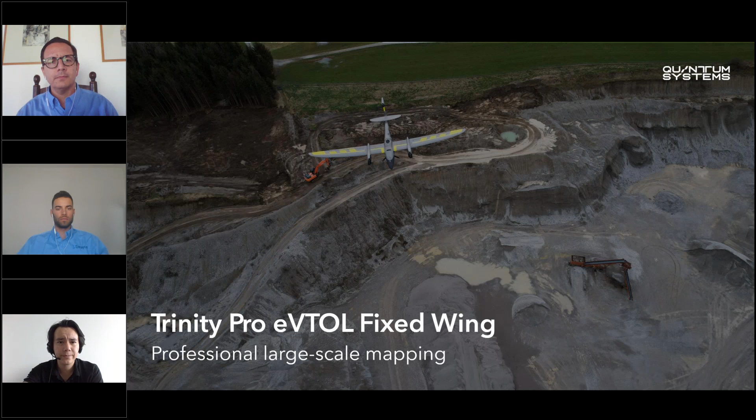Lastly, on the Trinity Pro, I want to mention the wide array of different sensors we have available, many of which are extremely useful in the mining environment. We have photogrammetry cameras, which are pretty well understood within the mining industry—the Sony RX1 and the Sony UMC. Both have different applications. We see a lot of guys using the Sony RX1 for its extremely high resolution and high quality outputs, and people using the Sony UMC when they're trying to stretch coverage and use a lightweight payload for rapid mapping.

Additionally, we've added to our portfolio with the Oblique D2M camera, which is really interesting as it enables us, within the mining context, to get extremely high quality data on pit walls and faces and any kind of vertical structure where you might normally struggle with traditional photogrammetry. We also have multispectral cameras, which a couple of mining companies are starting to use as they monitor the environment for different environmental projects. But typically, most of our mining customers stick with photogrammetry cameras.

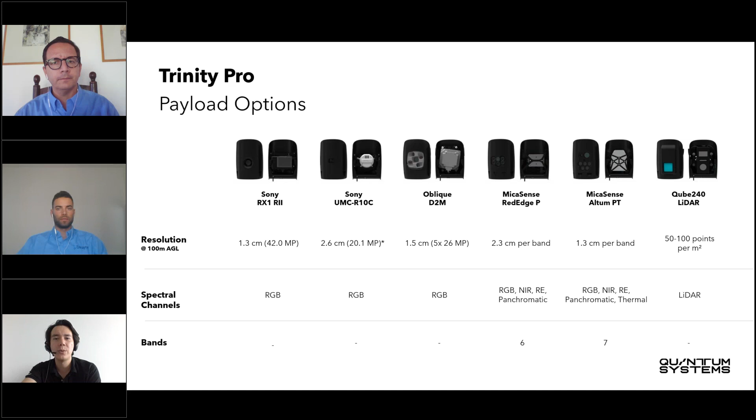And lastly, very excitingly, we also have a survey-grade LiDAR solution, the Qube240—the best-in-class survey-grade LiDAR on a fixed-wing platform, and it's truly exceptional what sort of data you're able to get out of it. We've had excited customers operating within a mining context who are now able to penetrate trees and canopies and capture the data they really need, irrespective of the different types of data they're looking for. So we have a huge array of different payloads, trying to make sure we cover every single possible application, and certainly within the mining industry, we have a lot of different solutions available.

As a result of that, over the last couple of years, we've been quite successful in the mining industry. I think mining is really one of those industries where people understand the benefits of drone technology and what they can do with it. We've got customers operating these drones in dozens of countries on every continent around the world, and that's given us a lot of experience. We've learned a lot from our customers as they push these systems to the limits, and we've learned how to build a system that's able to handle those limits and excel in the tough environments mining customers are used to.

It's being used by a lot of different companies. I'm not going to name drop any of them here, but some of the largest mining companies around the world have been using our platform very successfully, and they're expanding their utilization of them as well.

We've seen a variety of different applications. There's lots of different data sets you need to find around your mine site for various things, and as drones continue to be adopted more and more, we're seeing them utilized more and more in capturing that sort of data. That's really pushed the growth on our side—we've seen fleets expanding, applications growing, and generally the adoption of the market increasing significantly. It's been a really interesting couple of years, and we can see that the mining industry is really leading the pack in terms of drone adoption as they push the boundaries on data acquisition and what can be done with aerial data.

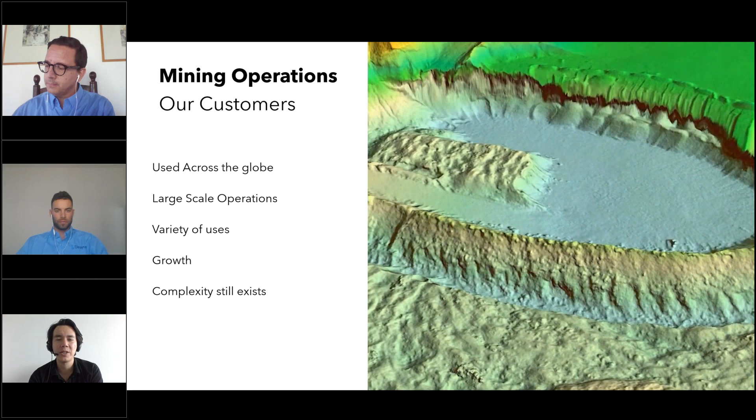That all being said, even though there are all these different users, there's still a lot of complexity with the workflows. I can remember going back to the beginning of the commercial drone industry and how difficult and complicated it would be, how all of the different software solutions that you had to jump through in order to actually use that aerial data that you've just captured. It's improved slowly but surely, but this is really where it comes down to today and why we're so excited about our partnership with Strayos, because Strayos have got a really wide array of different software solutions that will really change the game and change the way people are interacting with aerial data. They're looking to remove a lot of that complexity in the workflow and give our mining customers a really simple solution that enables them to be quick and efficient, and they don't have to be the absolute experts in drone operations that we've had to rely on over the last decade or so.

So with that, I'm really happy to hand over to Strayos, who are going to explain a little bit more about their software packages and how they're using AI to really push the boundaries of data.

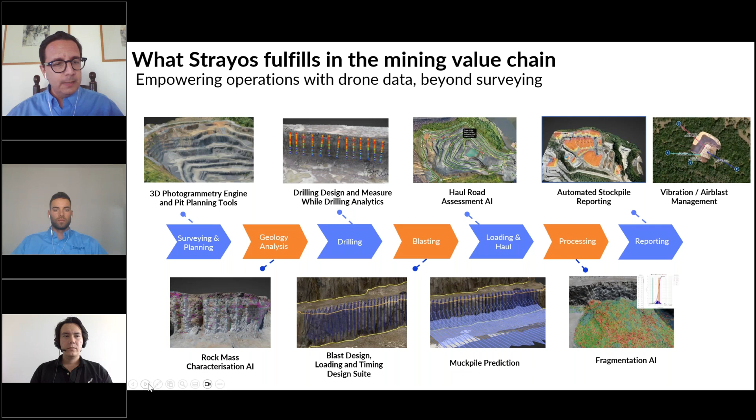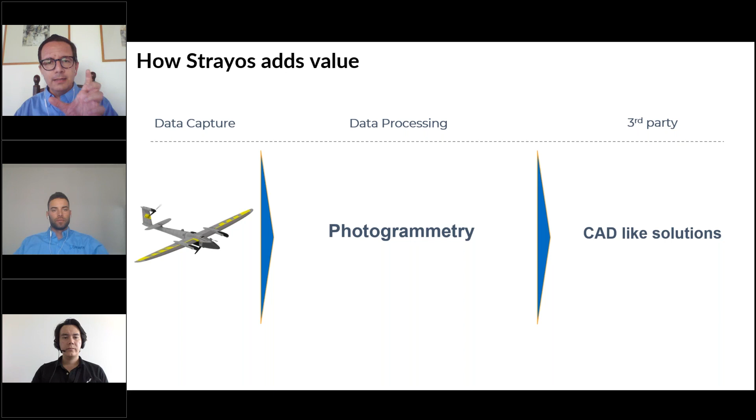We found, from a product perspective, that there was a gap we could fulfill on the data processing part. So there is data capture, data processing, and third party - this is an established workflow. But we said, okay, we can tie AI into it and mix it with photogrammetry to really extract more value from the data that mining companies are actually collecting every day.

So what was the thought around it? We said, okay, users don't like to change the workflow. They don't like to change standard operating procedures. But what about if we do all the heavy lifting and extract more data from the same data that is collected every day? And that's what we built.

So basically, the user goes out, flies a Trinity Pro, and then with the same exact workflow, collects data. The only thing that changes with Strayos is eventually a user interface, then uploads the data to the cloud. Then as a technology software company, we do all the heavy lifting, which also means we apply AI to extract more value from the same data. So from a user perspective, the same workflow, but there is way more value and way more use cases fulfilled, which also means once you bring it into a third party...

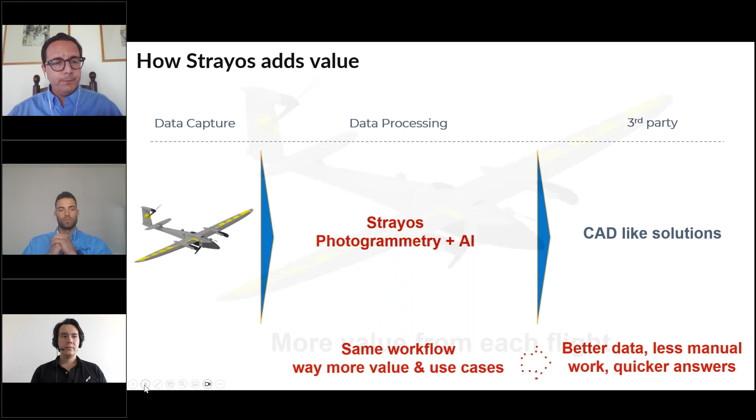These exist and have been existing on the mines for many years, so that's not where we focus. We really focus on that middle step. What is really happening is that we are able to bring better data, which also means less manual work, which also means we provide quicker answers. So essentially, we provide more value from each flight.

And this honestly has been a dream of mine for the last probably 10 years. I've seen a lot of data that is captured, and I always thought there must be something more that can be done with that data. And I think now we're really in a next gen phase in the industry where by keeping the same workflow, we can really extract more value. Without further ado, I'll pass it on to Eli, who's going to take us through some of the concrete use cases. I hope you'll enjoy the rest of the presentation.

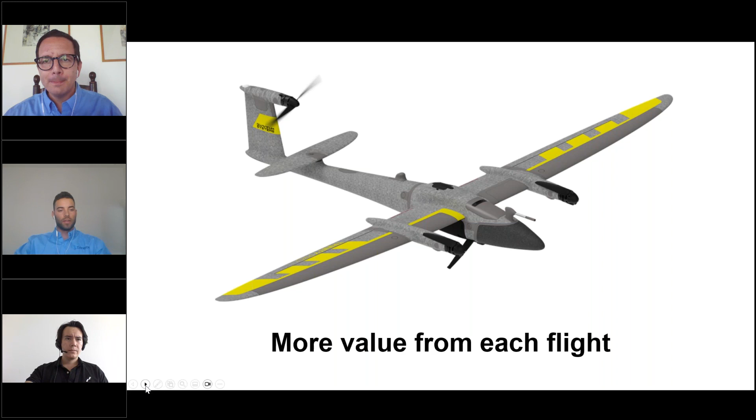Thank you, Matteo. Pleasure to be here and speak on behalf of Strayos and share some of the use cases here. Carrying on from what Rob and Matteo shared, what we're doing is bringing more value to these drone flights. What I'll share today are some specialty use cases and some vertical solutions to how we can apply AI to the mining workflow.

But by no means are these all the tools and modules in Strayos that can help on many different levels. I think these will speak well to the mining industry here on how we can improve on the current workflows. So we'll start things off with inventory management, carrying through to our haul road assessment, pit progress design, talk about high walls, and then end with our drill and blast progress.

So to begin, Strayos, similar to other photogrammetry softwares, can analyze and provide volumetric information regarding stockpiles and inventory management. What's different about Strayos here is where we apply the AI is the auto detection of these stockpiles. So versus an older workflow where you might have to manually draw these piles, which you can still do in the software, the AI can automatically detect these, and then users have the option to upload material databases so they can tie densities to achieve tonnages and even pricing to that.

Based on this auto detection and volumetric suite of tools, we also have our automated reporting to report all the findings and essentially track the inventory on site where there's material coming out, going, being produced. There's a dashboarding function that can be utilized by users to track the progress and measure quantities accurately and report their prices.

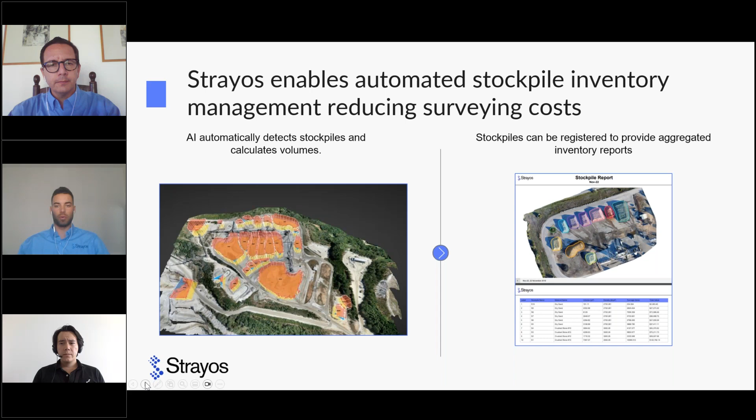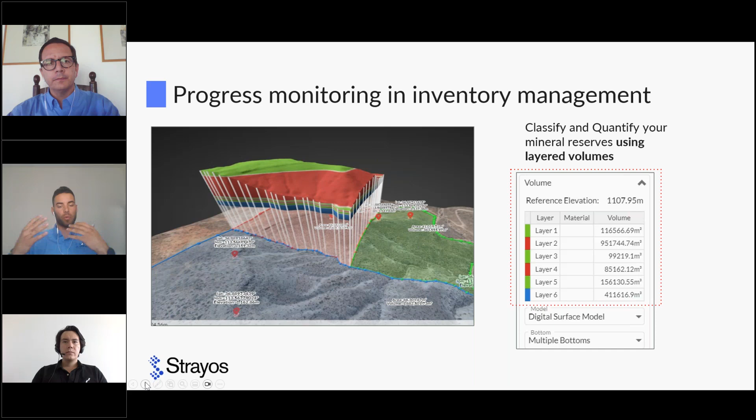So to go along with the inventory management, there are several tools in the software where you can look at volumes at different levels of areas for more of a pit planning and progress monitoring sort of tool. In this example here, we're looking at our layered volume tool where we can segregate different layers of the geology, or if we're trying to segregate overburden from our mineral content, we can really break out these layers to adjust where in the planning workflow we're trying to mine this material at different levels. So it just gives the user some flexibility on how they want to report their quantities and plan their mining operation.

Transitioning now, we'll look at how we can apply AI to the haul roads and also the high walls.

Starting with the haul road assessment, based on the drone data and surveys achieved with the Trinity Pro, we can extract haul road information. Strayos applies AI to auto detect the haul roads. You can see in the image on the top right corner, the haul roads in this example have been detected, and the user can toggle on options to see grades, crossfalls, and berm.

Heights, and road widths of those detected haul roads. This is all automated, a process that occurs during the upload of imagery and processing of the 3D model. This has a direct benefit on topics such as safety, addressing fuel consumption, and project compliance, talking about high wall heights or berm heights, road widths, etc.

Being able to extract this information and bring it into third-party software for further analysis can all be done. But essentially, gaining this information from the drone flight is now an option that doesn't need to be done in any other software.

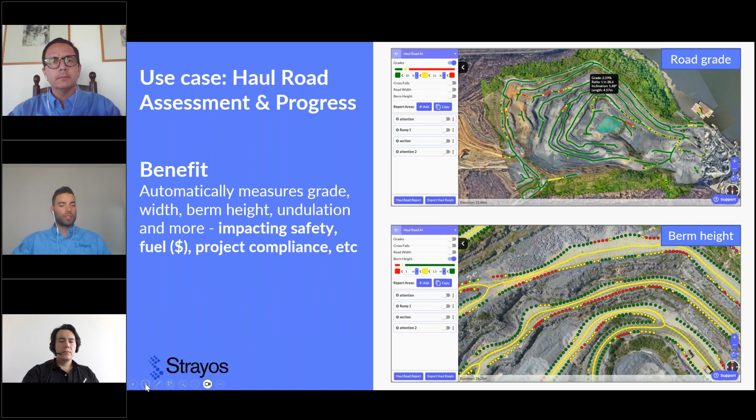It's important to mention we can run this on standalone data versus historical data. So for previous drone flights, Strayos has the capability of uploading processed 3D models to run the analysis as well.

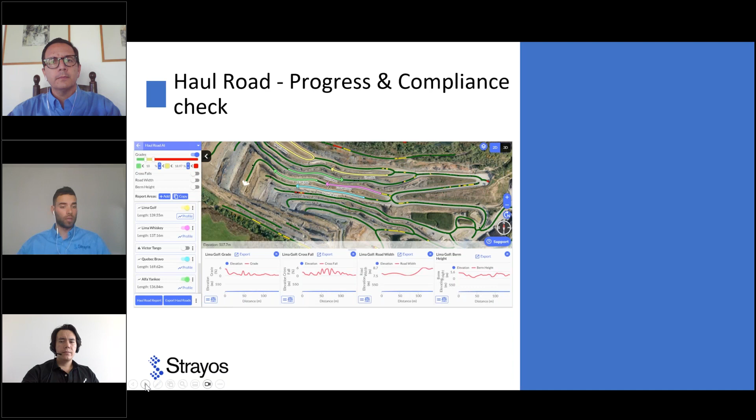Speaking further on the haul road analysis, we can also highlight several sections that we want to report on individually. In this example, sections of the haul road have been identified, and we can see KPIs on the bottom looking at things such as road widths, berm heights, and crossfalls, which we can track and report for individual sections at a time.

We can also copy these regions of interest to separate projects. So if you're flying your site at the beginning of the month and again at the end of the month, and you want to compare any changes in those haul roads, maybe see how the grade has changed or any physical features we talked about, you can do that from project to project.

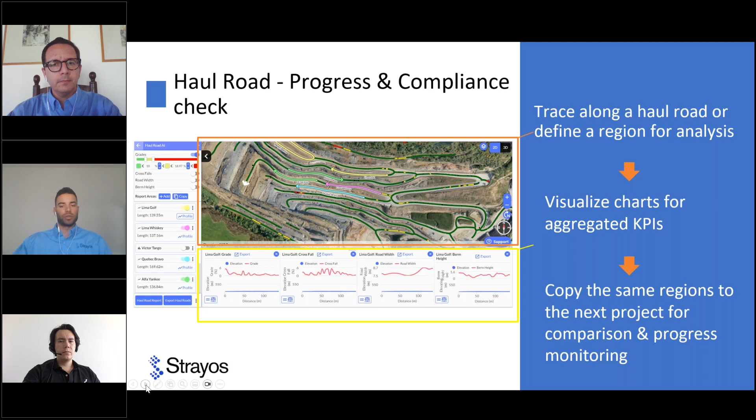Lastly, with reporting, all the modules in Strayos come with an automated reporting function. This means based on the data and what the user decides to manipulate, toggle on or off, and show as maybe a percent, as we can see here on the cover page.

This will then be formatted into an automated report that can be shared via email or PDF with the team, showing the findings, in this case, of the haul road assessment. We can see road grades, crossfalls, berm heights, and road widths, plus supplemental information in the report as well. The automated process serves a huge time savings in the operation itself.

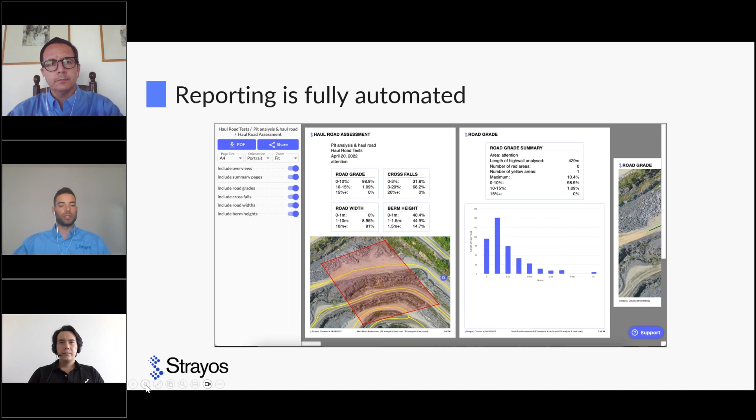The overall benefit of monitoring these haul roads: some mines vary in size, from very large mines with complex haul road systems to maybe smaller systems where trucks are running on a daily basis. Overall, with this monitoring progress, what we can really look at is trying to improve cycle times.

Understanding the traffic patterns, maybe preventing any safety incidents on the road. Reducing fuel and tire use is also a huge factor, where we can address maybe where grades are exceeding the desired grade on the road itself, or we're looking at tire use and wear.

So a lot of these direct functions that we can pull from the haul road assessment, we can measure and really gain a benefit in the operational stage.

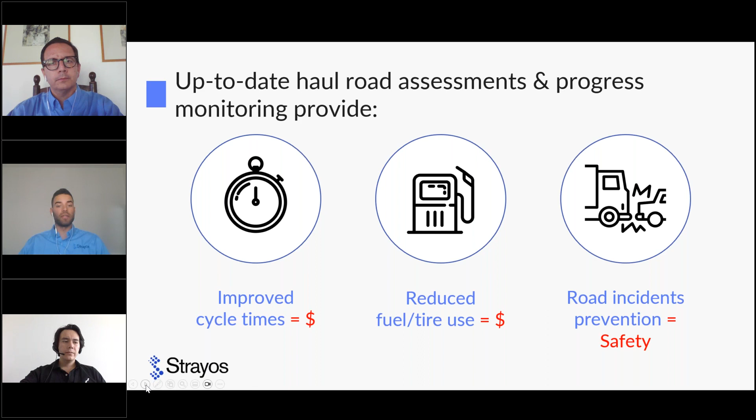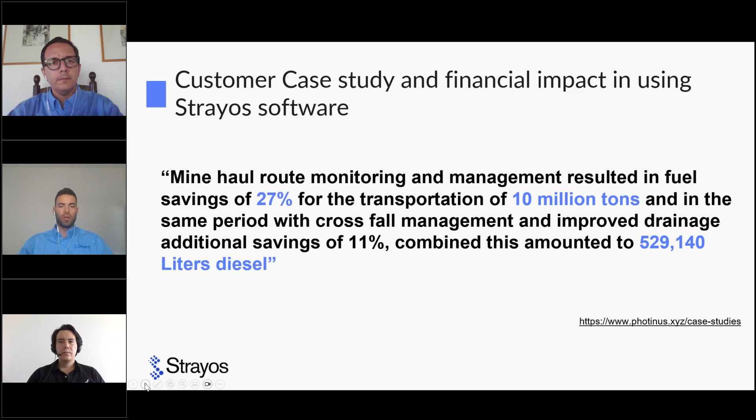So we'll transition to the high wall and geotechnical side of things with the use cases regarding Strayos. When talking about high wall safety, Strayos applies AI to detect physical features of the mine site, first of which is automated crest and toe detection.

Based on the site, as the model processes and uploads, we see this automated crest and toe detection, from which we can pull things such as high wall heights, face angles, catch bench widths, and inter ramp angles.

Looking at the benefit of monitoring these conditions, it's again the safety aspect, but also safety and compliance itself—making sure high walls are in compliance, catch bench widths, and monitoring design versus actual, which we'll get into later.

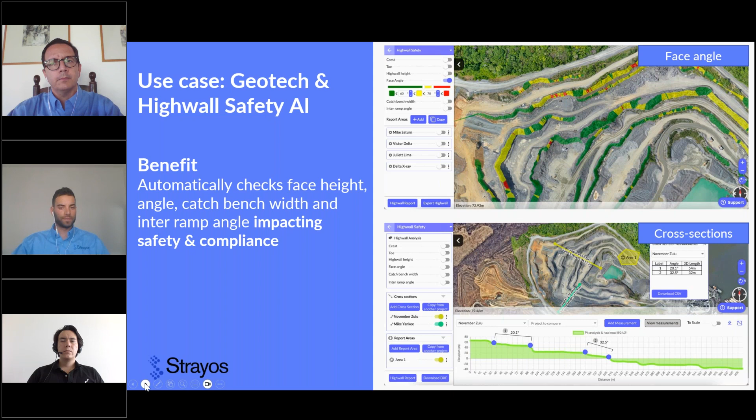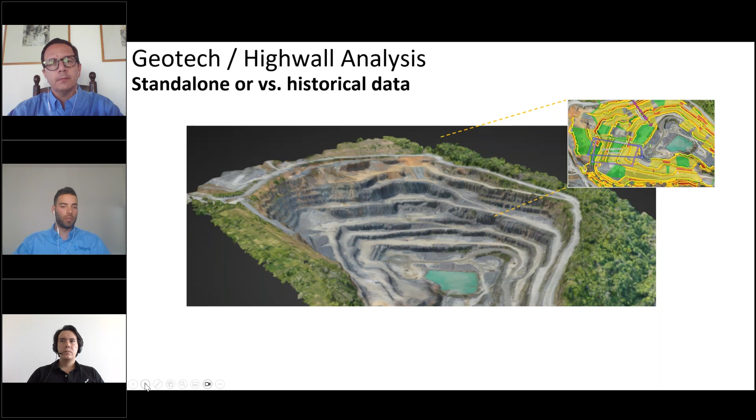We'll see the reports here on the next slide, where we can see a cross-section that was drawn, but also based on the area of interest, we can monitor and measure things such as high wall heights, angles, catch bench widths, and inter ramp angles within that one section of area.

This is just a sample of how this can be generated and shared with the team, whether via email, PDF, or the cloud-based software, so access can be remote anywhere.

Talking more about compliance and comparing design versus actual conditions in the mine, in Strayos we can also upload a DXF surface, maybe a mine plan, to compare to the drone flight that we went out and captured.

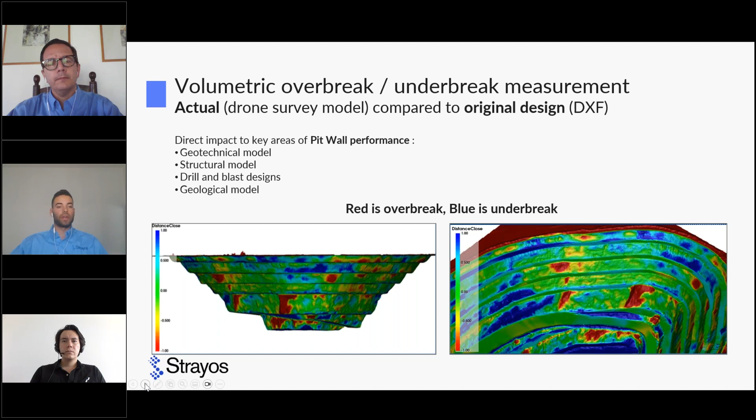Additionally to the geotechnical side of things, we also have a rock mass AI that can be applied to high walls and certain areas in the mine where we want to look at dominant discontinuities in the geology, looking at things such as bedding planes, joints, and seams, reporting dip angle, dip direction, and strike.

Talking about the overall benefit of this up-to-date high wall assessment, we're going to first talk about safety and monitoring these high wall conditions to prevent wall failures, looking at things such as slopes. This has a huge cause and direct effect on monitoring these cases to prevent the high wall failures.

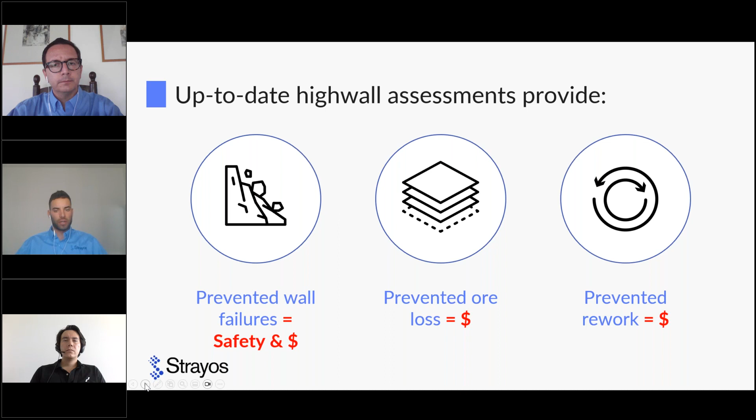Also talking about prevented ore loss, understanding the geology, and also preventing rework in the mine, making sure things are mined according to plan, areas are being mined correctly to design, and we can measure that using the compliance tool that we looked at.

So we'll transition to our pit progress and design conformance. I'll take a second to note here, Strayos is not a long-term mine plan software. Essentially what we do is look at day-to-day conditions, and we can apply more short to mid-range planning features that can be used in parallel to maybe a long-term mine planning software.

So if you want to compare two data sets to look at extraction of material in a certain area, you can do so, or maybe run this on a design layer that you want to upload as well. We have those options to run more of those short-term planning features in monitoring the conditions of the cut fill.

We talked about the layer volume tool a few slides ago, but essentially we can segment certain areas and report volumes to really show more of a shorter outlook of conditions that are looked to be mined in high quantities for operational purposes.

Looking at the pit progress and compliance, again, we talked on the cut fill, but also Strayos is going to report or have the option to report several elevation models, contour files, custom generation for different mapping projections, looking at areas of non-compliance when comparing two models, and also just monitoring volumes of excavated material.

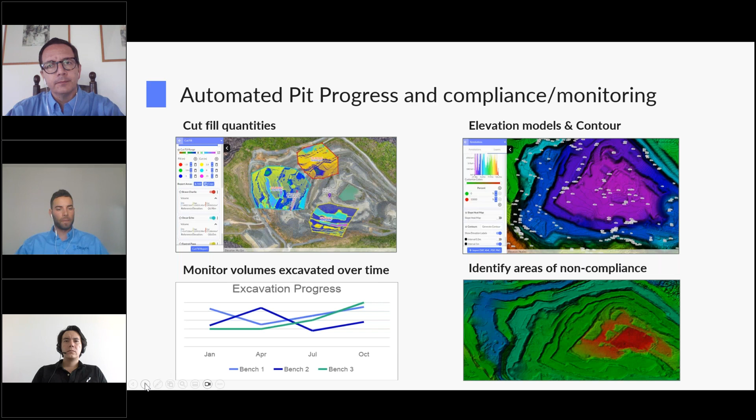So lastly, we're going to talk on the drill and blast project progress. Strayos, not going to say specialized in drill and blast, but we definitely have a robust suite of tools to complete the drill and blast workflow.

And that's going to start with completing a drill design within the software, but also allowing users to upload their own drill designs that maybe have already been done or carried out in the field. Following that, users can then complete a loading and timing functions of that design.

Strayos is also going to allow them to view prediction models for fragmentation, muck pile, and vibration analysis. We then offer more performance measurements where we can look at fragmentation data, look at things such as muck pile movement, and further vibration tools as well.

Crucial in the loading and hauling process, making sure that these floors are smooth for equipment to run over, but also when we look at the drilling and blasting operation, making sure this floor grade stays level, we're not over digging or under digging, excess sub drill or maybe high bottom from the drilling and blasting operation.

So we can overlay this drill and blast data to the floor to correlate any issues that we're seeing in the floor, whether it is high bottom or maybe sub drills being dug out, and make sure we can relay this information to the operation to ensure that the drill and blast operation is moving along correctly.

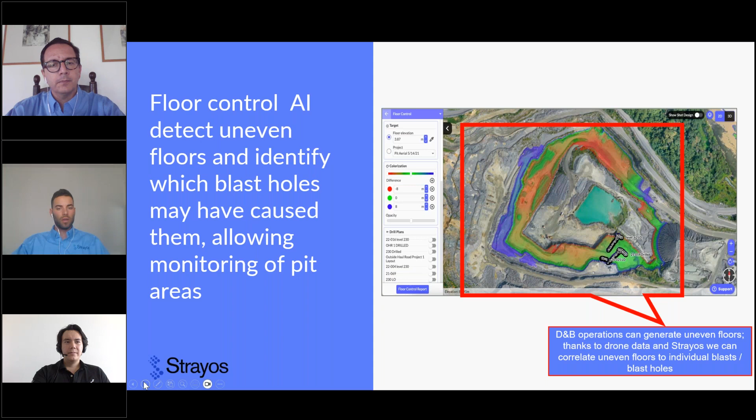Another area we're going to apply AI in the drill and blast process is our hole collar auto detection. What we can do is essentially, based on the drone model, fly a blast post drill, and the AI is going to auto detect the collar location.

This is a very easy tool to use, providing very valuable data on the quality of that drilling, which has a direct effect on the shot outcome, whether it's excess burden or spacing, looking at how accurately these drills are set up, which impacts the actual shot outcome.

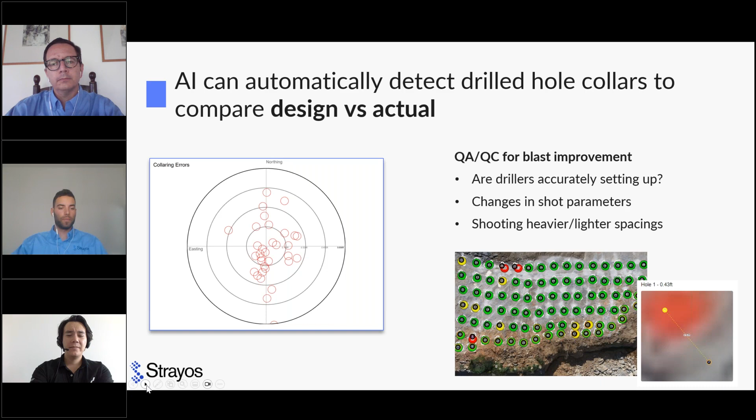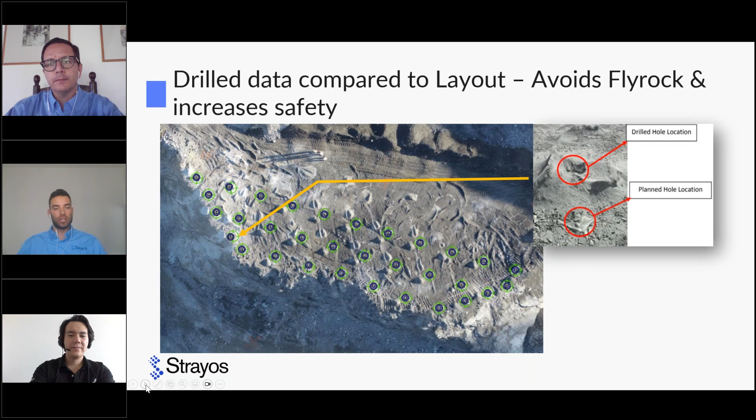Looking at another use case, we can see the shot based on the ortho photo, the AI detected holes, and the design overlaid onto that. In that one location, we can see the drilled hole versus the planned location. Holes will never be placed in the exact correct location in some instances based on field conditions. However, being able to monitor and measure the changes is going to be crucial in the loading process.

That's going to be the burden, the spacing, looking at things such as powder factor, and some geology characteristics at the bottom. This information all comes together to form the prediction, but it also allows users to make adjustments in those parameters to compare changes, whether adjusting their pattern slightly to see the fragmentation prediction adjust, or adjusting their powder factor or the products used in that blast to see changes in the fragmentation prediction.

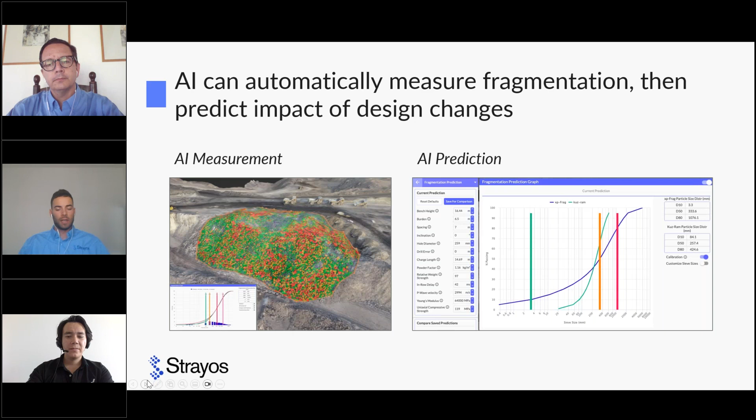We talked about fragmentation, and I'll also speak on the muck pile analysis. Similar to the fragmentation prediction, we can also predict the muck pile, predicting things such as average and maximum throws, center of mass movement, and trough drop — really looking at the movement of that muck pile based on the design, loading, timing, stem height, and geology. Based on this prediction, whether it's a loader-based operation, excavator, or shovel, we can really optimize the cast of that muck pile to benefit the digging operation taking place.

Just after a few blasts that can be analyzed, understanding the movement of this muck pile — maybe the mine has things really down pat and its drill and blast operation is operating smoothly — but measuring these conditions and tweaking the smallest things can really serve great savings over time.

Looking at the measurement here, detecting the boundaries of the muck pile is something the AI is going to do in both the fragmentation and the muck pile analysis, but also on the prediction side, calibrating these predictions and adjusting things so future predictions become more accurate after feeding in that post-blast data.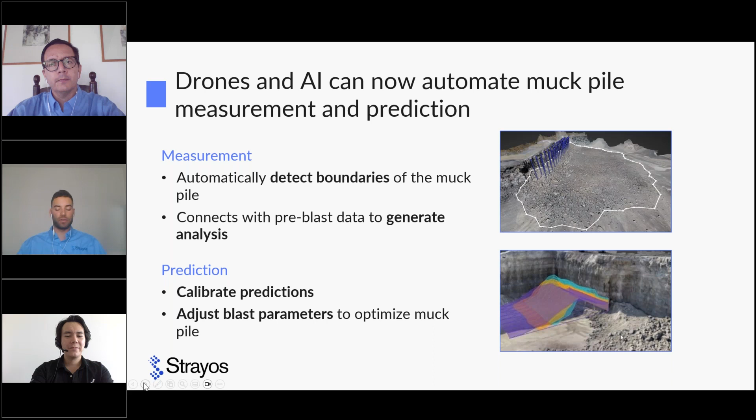So overall, looking at the drill and blast quality control, why is this important? I always like to say, drilling and blasting is kind of the head on the spear for the mining operation. It's how we're extracting minerals, moving large amounts of earth and rock to be processed, and using explosives is the best tool to do that.

When we move this material, really trying to improve the dig and crusher rates is the ultimate goal. Making sure the digging operation is smooth, fragmentation is ideal, and essentially you're trying to separate ore from waste products. So really understanding how we can manipulate these conditions and design our shots properly to improve these dig rates and crushing rates. This all starts with the drilling as well.

Drilling is the highest cost in this operation, and making sure it's done correctly, holes are in the proper place, proper patterns are being achieved, and we're measuring that on a consistent basis to make sure conditions are optimized. This will all feed into the overall cost of drilling and blasting. So the better quality shot that's on the ground, the easier it's going to be able to dig, the more efficient the crusher is going to be able to operate, all saving a cost in each step of the operation that's going to compound greatly over time.

And that's what we're here to do, is to help with this, provide the information, the value from the drone flights, compiling all these tools into one software is what we're here to help with.